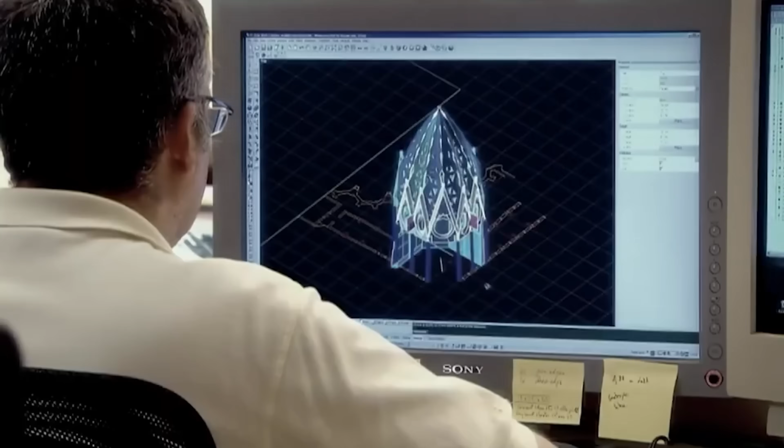Workers laid the foundation stone in 1882, before the Eiffel Tower existed, before the first skyscraper, before anyone had poured reinforced concrete. The building has survived 2 world wars, a civil war that destroyed the construction plans, a pandemic that halted work entirely, and technological revolutions that changed how humans build. So what does it take to finish a construction project that's outlasted empires?

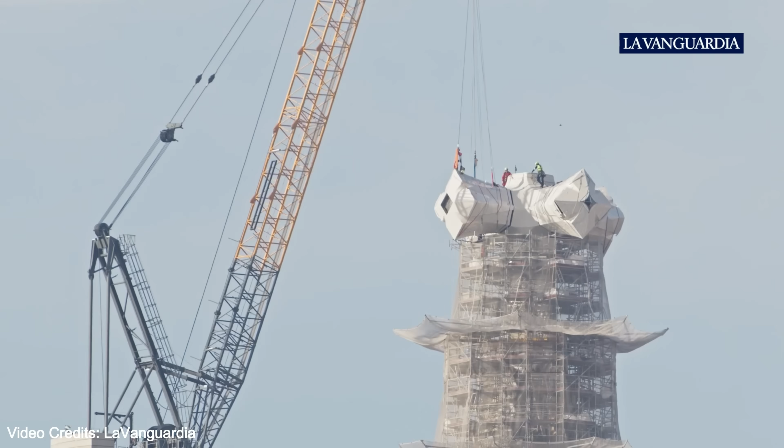By mid-January 2026, workers had installed all 4 horizontal arms of the cross. On February 20th, they installed the upper arm, bringing the tower to its highest point. The structure is complete. The entire structure reaches 172.5 meters, taller than St. Peter's Basilica in Rome and nearly twice the height of Big Ben in London.

That final height isn't arbitrary. Gaudi believed human creation shouldn't exceed God's work, so he deliberately designed the tower to stand 1 meter shorter than Montjuic Hill, Barcelona's highest natural point. The timing carries enormous significance. 2026 marks the centenary of Gaudi's death.

The Sagrada Familia Foundation has planned a year of commemorative events, starting with a solemn mass on June 10th and culminating in the lighting of the Nativity facade in December. Pope Leo XIV is expected to visit during 2026. If confirmed, it would be the first papal visit since Pope Benedict XVI consecrated the basilica in November 2010.

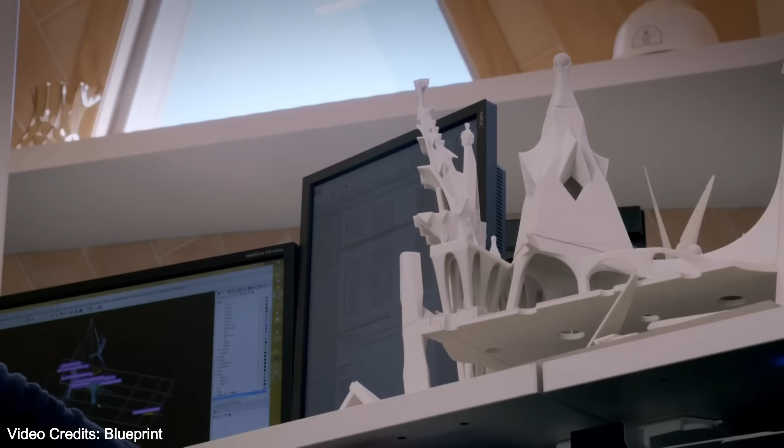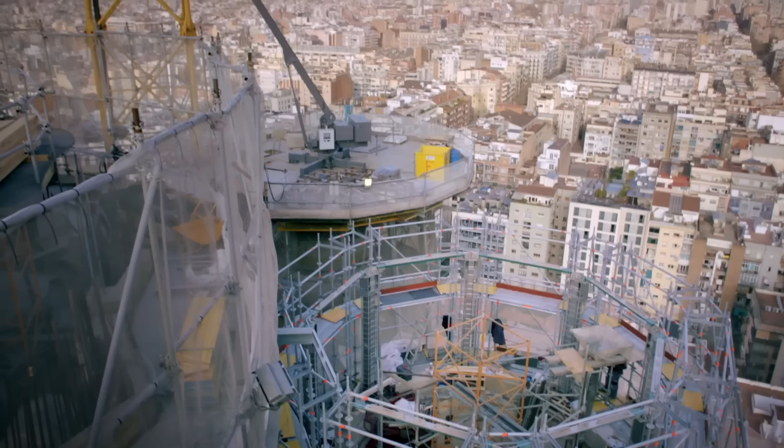Construction began on the Glory facade's vertical walls in June 2025. Meanwhile, 3 artists are creating sculptures for the Chapel of the Assumption. Tourism funds everything. In 2024, 4.9 million visitors paid to tour the basilica, more than visited the Statue of Liberty or the Colosseum in Rome, generating 44.7 million euros for construction. About 15% of those visitors came from the United States.

The story begins not with Gaudi, but with a bookseller. Josep Maria Bocabella founded the Spiritual Association of Devotees of St. Joseph in 1866. After visiting the Vatican in 1872, he returned to Barcelona determined to build a church inspired by the Basilica at Loreto. On March 19, 1882, workers laid the foundation stone in Barcelona's Eixample district.

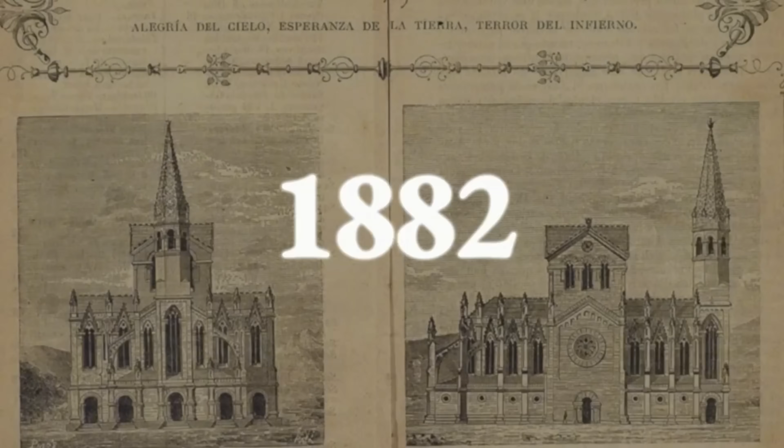The first architect, Francisco de Paula del Villar, designed a standard neo-Gothic church. But del Villar resigned on March 18, 1883, after disagreements with the project advisors. The commission passed to a relatively unknown 31-year-old architect named Antoni Gaudi. Gaudi threw out del Villar's conventional plans entirely.

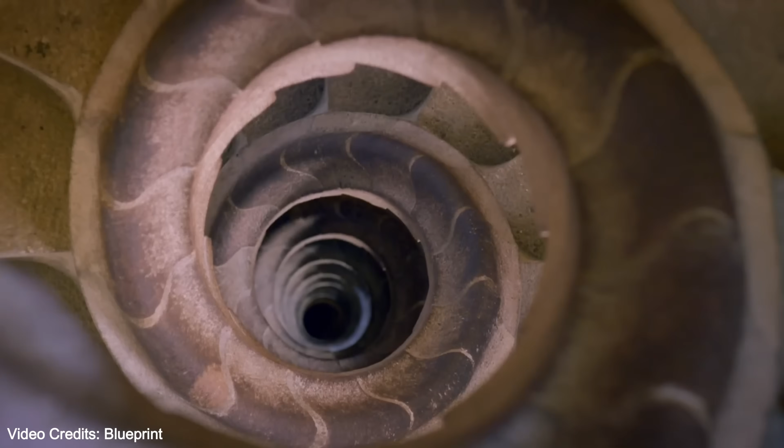He envisioned something Barcelona had never seen: a massive basilica with 18 towers representing the 12 apostles, the 4 evangelists, the Virgin Mary, and Jesus Christ at the center. His inspiration came from nature. He studied trees, bones, mountains, and shells, translating their organic forms into architecture. Columns branched like trees. Towers spiraled upward like seashells.

The basilica would tell the story of Christ through 3 grand facades. The Nativity facade would celebrate birth and life. The Passion facade would depict suffering and death. The Glory facade would represent resurrection and eternal life. Gaudi knew he wouldn't live to see it finished. He often said his client wasn't in a hurry.

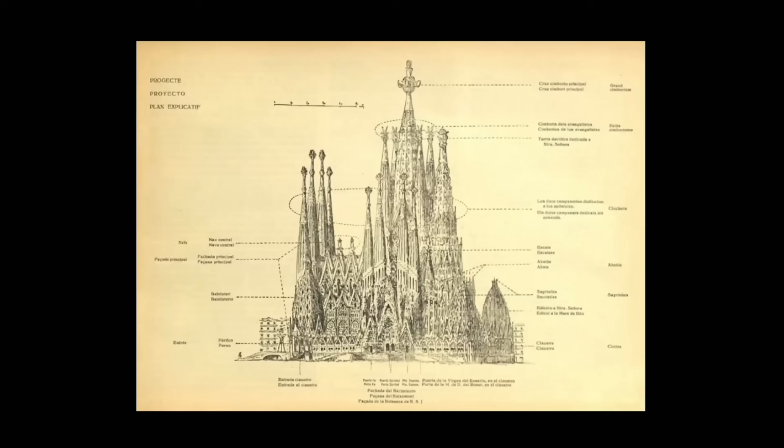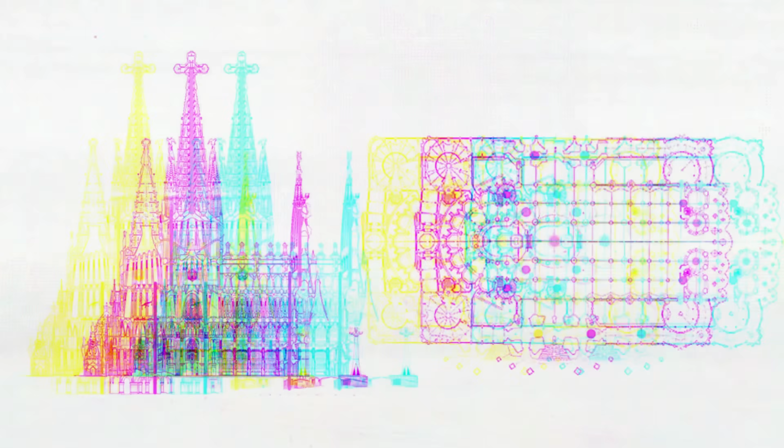From 1883 until 1914, Gaudi worked on multiple projects across Barcelona. But after 1914, he devoted himself exclusively to Sagrada Familia. He moved into a workshop on site, spending 16-hour days refining models and calculations. On November 30th, 1925, Gaudi witnessed the completion of the Tower of Barnabas. It was the only tower he ever saw finished.

By the time of his death, less than 1/4 of the basilica was complete, but he had created detailed plaster models and calculations that would guide future architects. Gaudi's final day was June 7, 1926. While crossing Gran Via de les Corts Catalanes at Bailén Street, Gaudi stepped back to avoid an approaching tram. He didn't hear or see a second tram coming from the opposite direction. It struck him at 6:05 in the evening. The 73-year-old architect fell, hitting his head on the pavement.

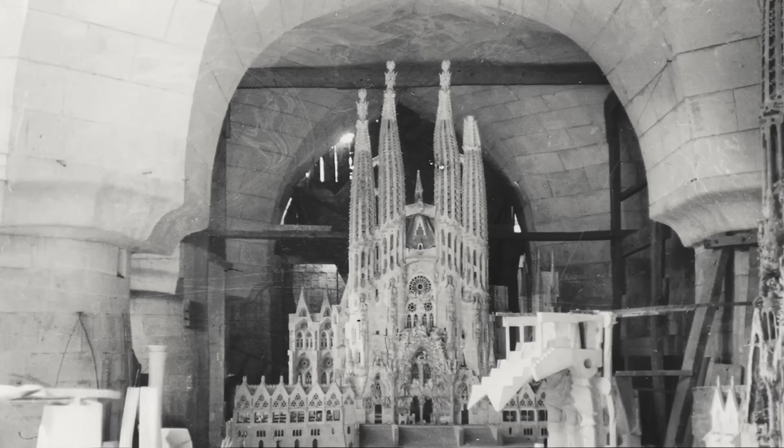In his final years, Gaudi had lived austerely, wearing shabby clothes and focusing entirely on his work. Passers-by mistook him for a beggar. Taxi drivers refused to transport him. A police officer eventually took him to Hospital de la Santa Creu. The chaplain from Sagrada Familia didn't recognize him until the next day. It was too late. Gaudi died on June 10, 1926, 15 days before his 74th birthday.

Thousands of Barcelona residents lined the streets for his funeral procession. He was buried in the Chapel of Our Lady of Mount Carmel in the crypt where his remains rest today. Construction continued under Domènec Sugrañes until July 20, 1936.

2 days after the Spanish Civil War began, members of the Federación Anarquista Ibérica stormed the construction site. They torched the workshop, destroyed Gaudi's models, burned drawings and photographs, and set fire to the crypt. They even smashed the lid of Gaudi's tomb.

The anarchists returned with dynamite, intending to destroy the Nativity facade completely. A government representative intervened at the last moment, saving the basilica from total destruction. The loss was catastrophic. Most of Gaudi's detailed plans, models, and notes were gone.

12 people connected to the construction project were killed during the Civil War. Sugranes died in 1938 at age 59. After the war ended in 1939, architect Francesc de Paula Quintana took over.

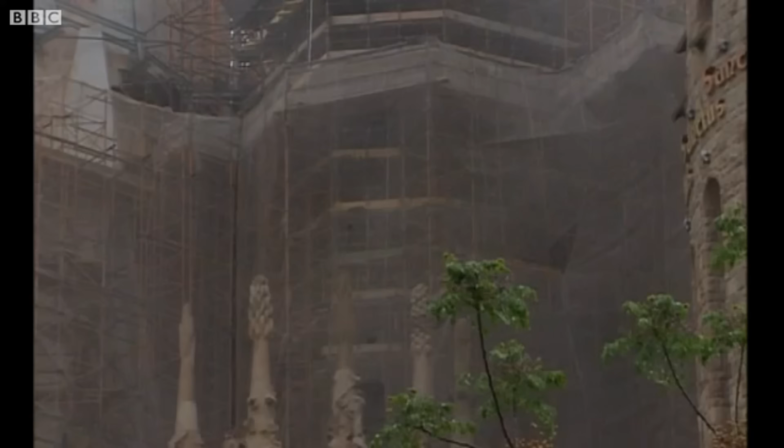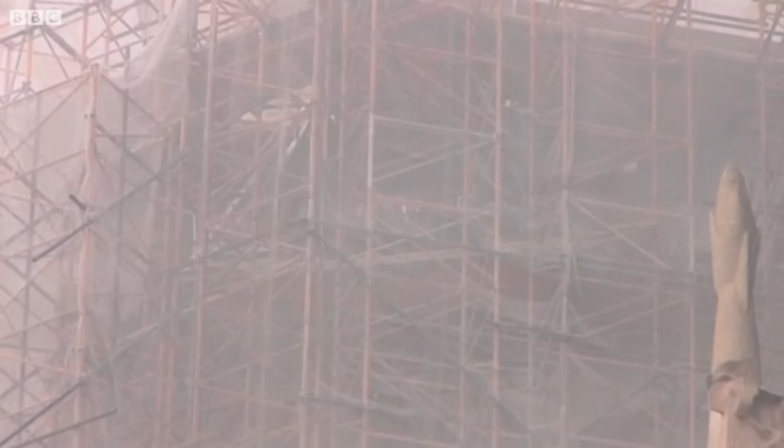Then came another setback. On April 19, 2011, an arsonist set fire to the sacristy, forcing the evacuation of 1,500 tourists. The fire burned for 45 minutes. A 65-year-old man with mental health issues was arrested at the scene.

COVID-19 brought construction to a halt on March 11, 2020. For nearly 4 months, work stopped completely. The basilica reopened on July 4, 2020, but the pandemic's economic impact had severely reduced visitor numbers and funding.

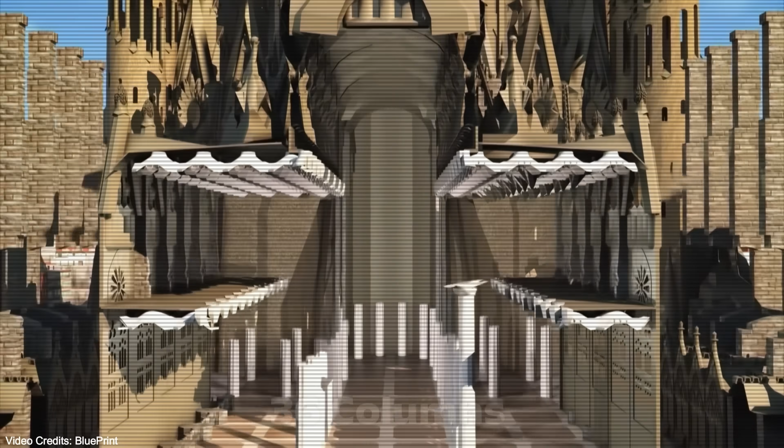Here's the core problem. Sagrada Familia has 36 interior columns supporting the roof, each one unique, none straight. For comparison, Notre Dame Cathedral in Paris has just 10 primary columns. Each column starts as a geometric shape at the base: hexagon, octagon, or 12-sided.

As it rises, it twists and transforms. A hexagonal column at the ground level becomes an octagon at mid-height, then splits into branches near the ceiling. The twist rate varies. Some columns rotate 15 degrees over their height, some 30. These aren't decorative choices. Gaudi calculated load distribution through branching.

One column at the crossing supports the tower weight above, approximately 6,000 tons. Instead of channeling that force straight down through a single massive pillar, the column branches into 4 smaller supports. Each branch carries a fraction of the load, spreading stress across the foundation.

The geometry is hyperbolic paraboloid, the same shape you'd get if you twisted a square piece of paper while pulling opposite corners. The stone surface curves in 2 directions simultaneously. There are no flat faces to measure from, no right angles to reference.

When the Civil War destroyed Gaudi's models in 1936, architects lost the exact specifications for how each column should transform as it rises. Photographs showed the overall shapes. Surviving plaster fragments gave clues, but the precise twist rates, branch angles and connection points were gone.

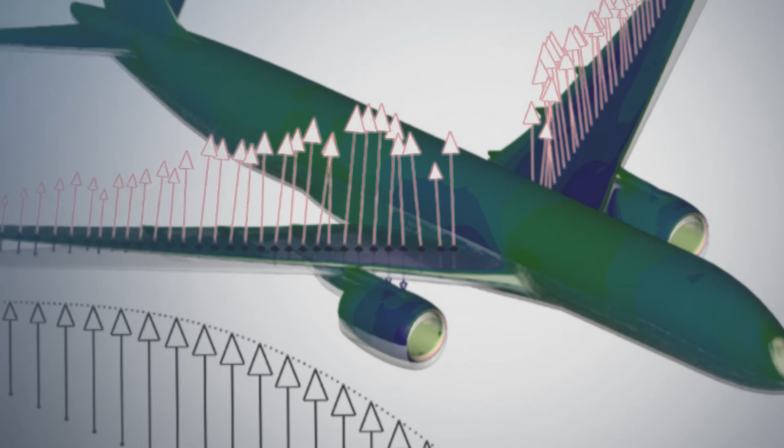The breakthrough came in the 1980s when Mark Burry introduced software designed for airplane wing analysis. The software could input the incomplete data from Gaudi's fragments, calculate the missing geometries, and verify whether the reconstructed shapes would actually hold the basilica's weight. But verifying the math didn't solve the construction problem.

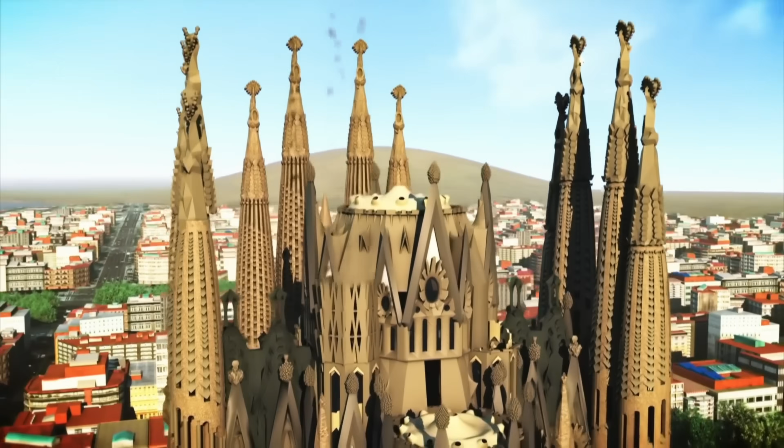Each column requires between 800 and 1,200 individual stone blocks, more pieces than a typical family home has bricks, carved to fit together with millimeter precision. The blocks must account for the column's twist, the surface curvature in two directions, and the exact angle where branches split. Human stone carvers working with traditional tools would need months per column, and even then, errors accumulate.

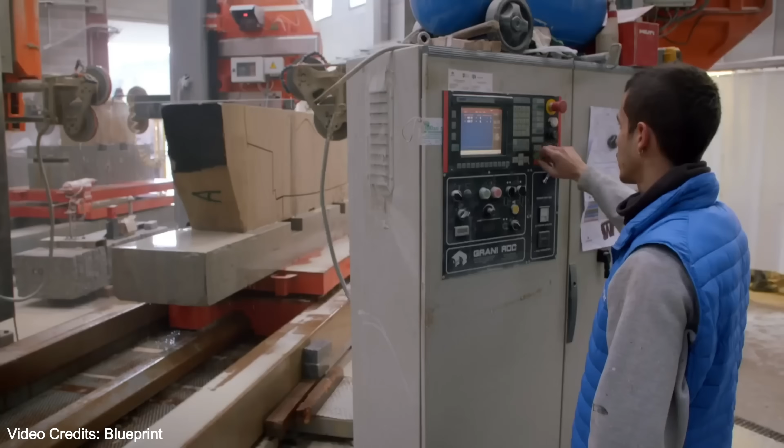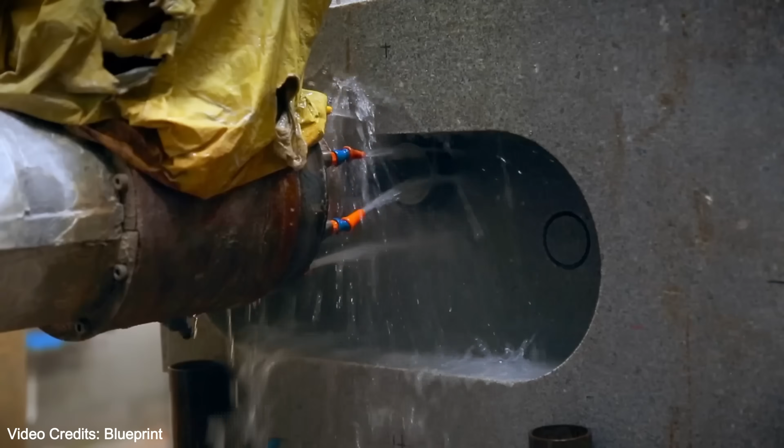That's why Dutch engineers built a CNC milling machine specifically for this project. The machine receives the digital column geometry from Burry's calculations. Then it cuts stone, initially using a 5-axis, now 7-axis robotic arm, meaning it can rotate and tilt the cutting bit in multiple directions simultaneously while moving across the stone surface.

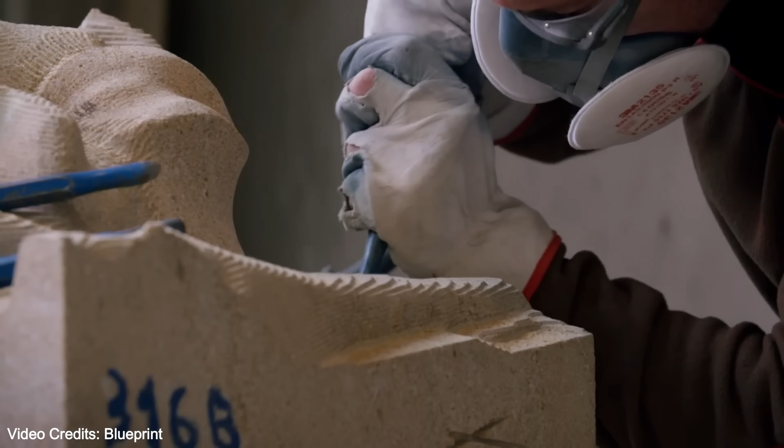The cutting precision is 0.1 millimeters. For comparison, human error with hand tools typically falls within 2 to 3 millimeters. When you're stacking 1,200 blocks over a 20-meter column, those errors compound.

A column off by 3 millimeters at the base will be off by half a meter at the ceiling. The branches won't align, the vault won't connect. The machine eliminates that error.

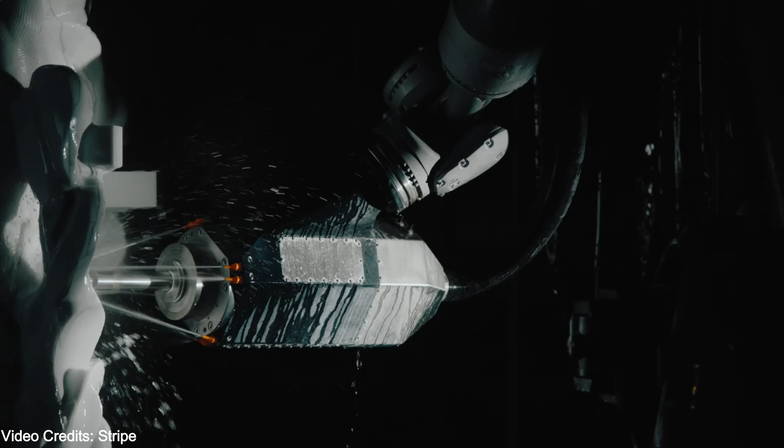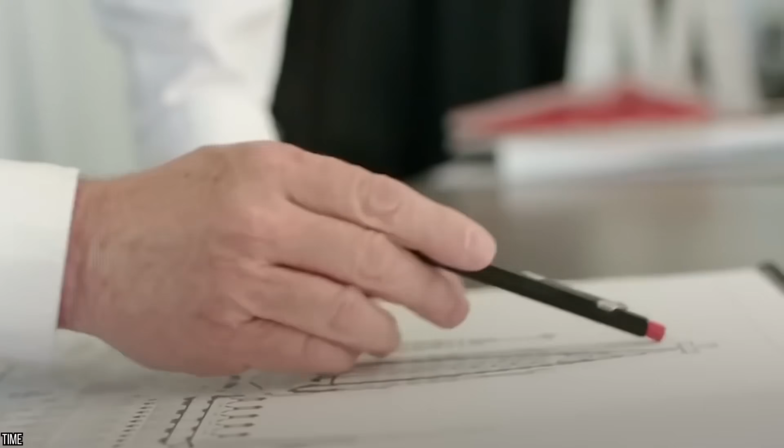It can cut a stone block's complex curved surface in 6 hours, work that would take a master carver 3 weeks. More importantly, the 1,200th block fits exactly as precisely as the first. This is why completion is possible now when it wasn't before. The combination of aeronautical stress analysis software and 5-axis CNC stone cutting solved both the design verification problem and the construction precision problem. Gaudi's vision required 21st century technology to execute.

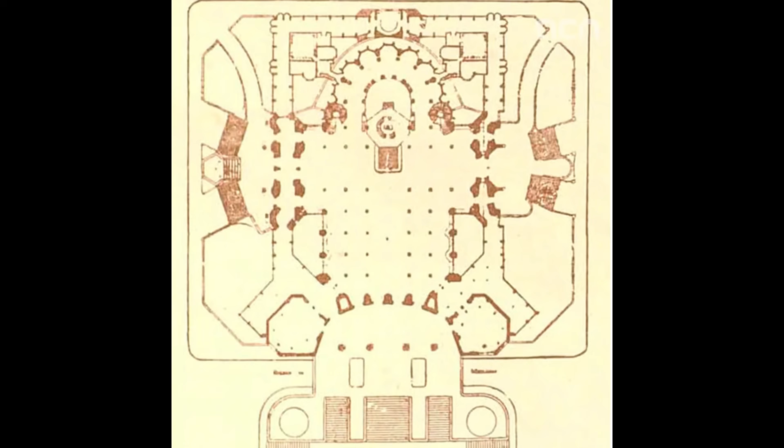Residents filed lawsuits claiming the staircase wasn't in Gaudi's original plans. They argue the construction board is inventing justifications to expand the basilica's footprint. The Sagrada Familia Foundation insists the staircase is essential. Gaudi's surviving drawings show it clearly. The foundation argues that completing his vision requires temporary displacement, with affected families receiving compensation and relocation assistance. In February 2025, Chief Architect Jordi Faulí announced they would proceed despite protests.

Some architecture critics argue that continuing construction betrays Gaudi's memory. They claim modern architects can't truly interpret his fragmentary plans. Others counter that leaving it unfinished would betray Gaudi's vision. The architect left detailed geometries and structural principles, enough for successors to work from. Leaving it unfinished would be the real betrayal.

The basilica operates as an expiatory temple, meaning it can't accept government money or bank loans. It relies entirely on private donations and ticket sales. The neighborhood around Sagrada Familia struggles with over-tourism. Local shops have been replaced by souvenir stores. Residents complain about noise, crowds, and rising housing costs driven by short-term vacation rentals.

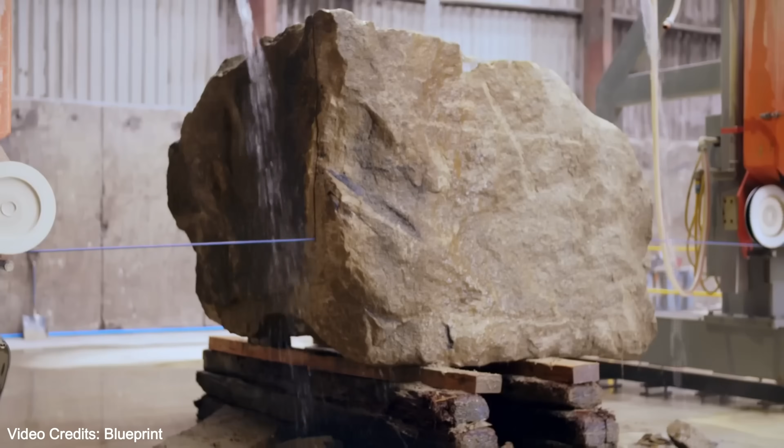After 144 years of construction, the question isn't just when it will finish, it's why now. For decades, completion seemed impossible, but modern technology solved what human hands couldn't. CNC machines cutting complex stone, software verifying destroyed plans, and tourism funding generating millions annually. These three breakthroughs made completion finally achievable.

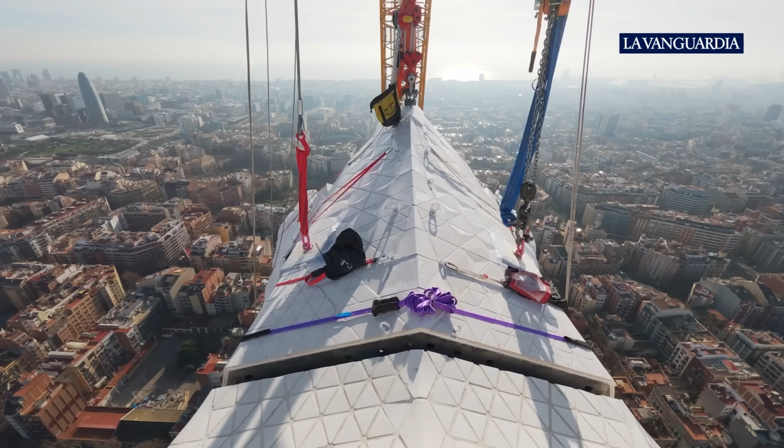Here's what completion actually means. There are 3 finish lines. 2026 marks the symbolic completion. The Tower of Jesus Christ, the central spire that represents Gaudi's entire vision, will be blessed and finished. This is the tower that makes Sagrada Familia the world's tallest church. It's the element Gaudi himself designed to stand at the peak, representing Christ ascending to heaven. When this tower is complete, Gaudi's spiritual and architectural vision is realized.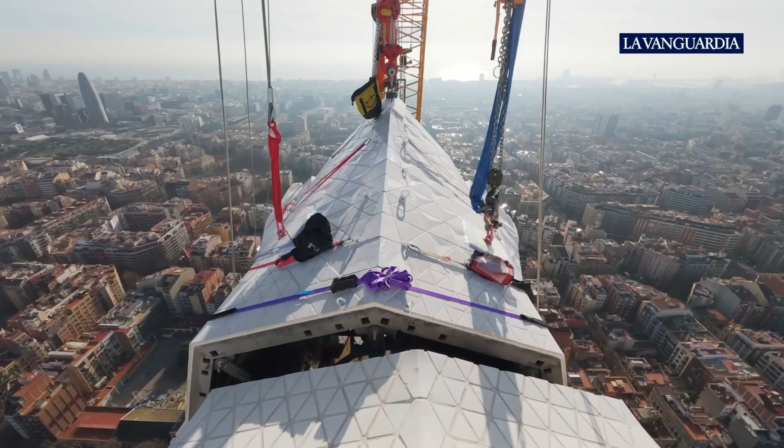2033 marks the structural completion. All 18 towers will be built. The glory facade walls will stand. The main vaults and roofs will be in place. This is when the last major stone is laid, 151 years after construction began. The building's skeleton will be finished. And 2035 marks the decorative completion. The glory facade sculptures, interior details, and final ornamental work will be carved. This is when craftspeople set down their tools for the last time.

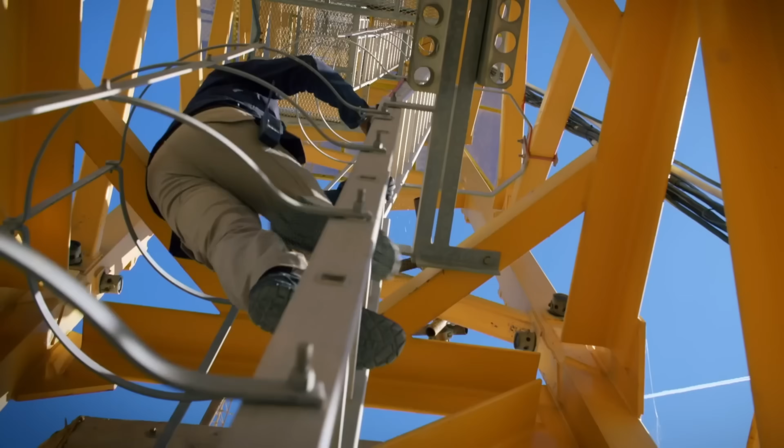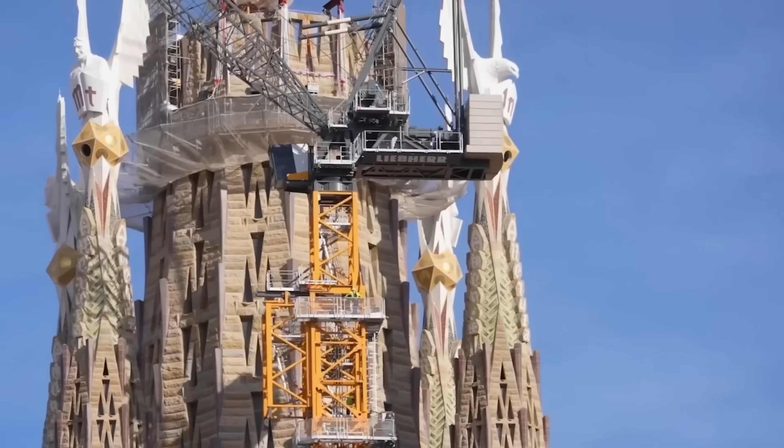After the tower opens in 2026, the viewing platform inside the cross will become accessible to visitors, probably in 2027. Visitors will climb to 172 meters and look across Barcelona from the world's tallest church. Architects, sculptors, and craftspeople have dedicated entire careers to this building. Some will retire having worked their whole lives on a structure their great-grandparents also helped build.

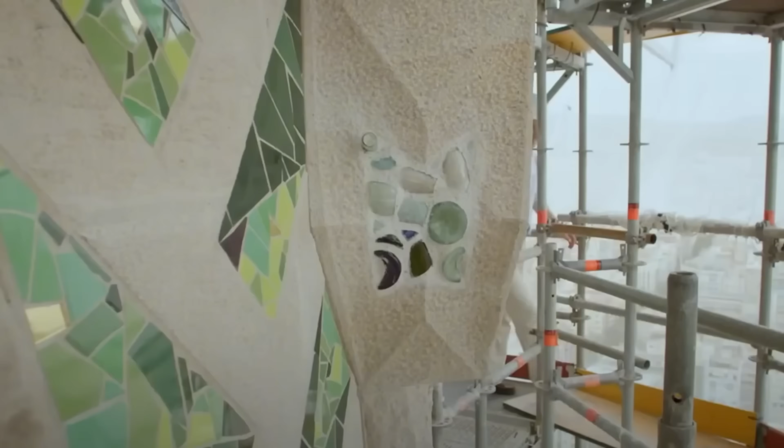When the last stone is placed, Sagrada Familia will transform from a construction site into a completed monument. The cranes will come down, the scaffolding will disappear. That moment will reveal whether modern architects truly captured Gaudi's vision. It will show whether a century of different hands could create something unified. And it will demonstrate whether a 19th century architect's dream can still inspire the 21st century.

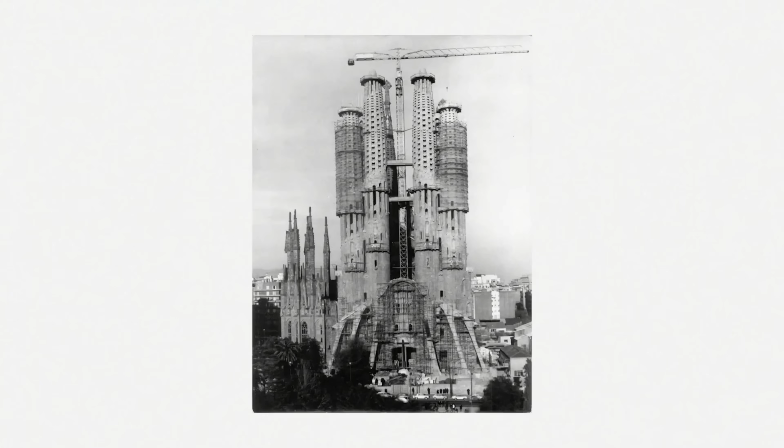Here's something to think about. In 2033, 151 years after Gaudi handed his first sketches to stone carvers, the last piece will be placed. Not by him, not by anyone who knew him. Now, those future generations are nearly done. Was Gaudi's vision worth the century-and-a-half wait? When you look at those towers reaching toward the sky, covered in light-catching glass and ceramic, do you think he'd be satisfied with what we've built in his name?